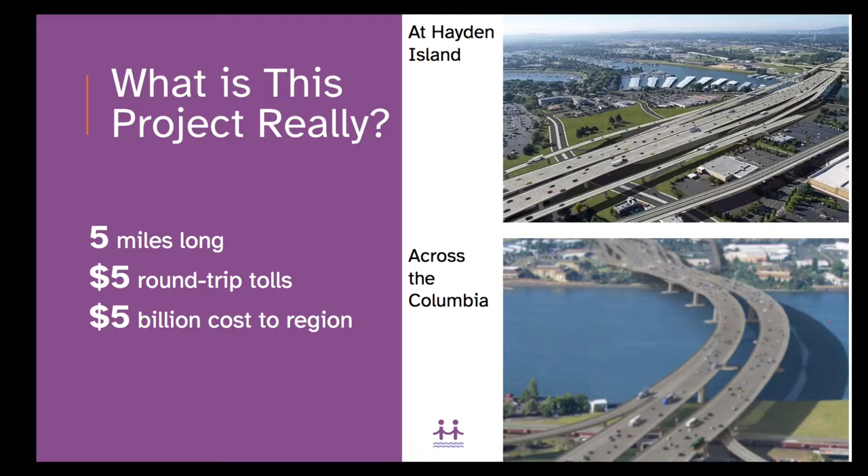And will cost the region $5 billion. It's truly massive. It's not just simply replacing the existing bridges — it's really much more than a bridge. Most of the cost of the project is rebuilding the freeway for miles north and south of the Columbia River.

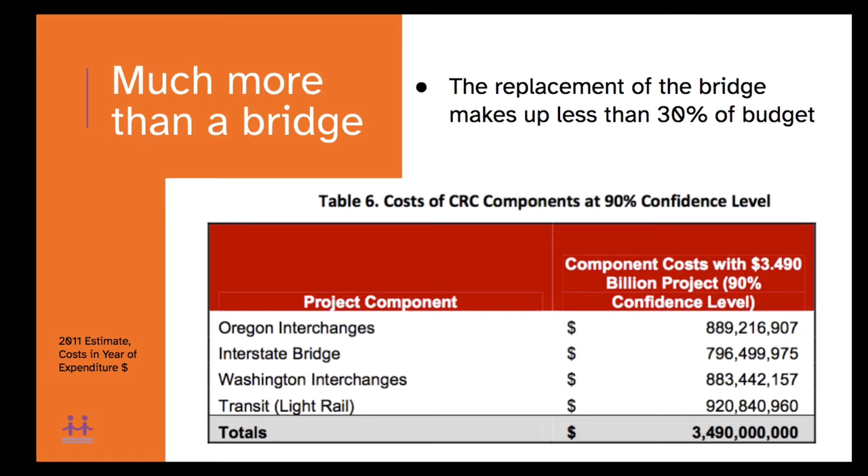Cost estimates prepared for the original project, the Columbia River Crossing, showed that less than a third of the cost was actually building the structure over the river. Most of the cost of the project is rebuilding freeways and interchanges north and south of the river.

And in fact, while the project claims that they're only adding a lane in each direction, it's actually building a much wider structure than that.

Back in the day of the Columbia River Crossing, we were told that it would be merely a 10-lane structure. But when we obtained, by a public records request, the actual plans for the structure, it turned out they were designed to be 180 feet wide, which was more than wide enough to accommodate 12 full lanes of traffic.

And the current project is proposed to be at least 164 feet wide, which is also wide enough for 10 or 12 traffic lanes. So it is not simply a replacement of the bridge, it doubles the auto-carrying capacity of the bridge.

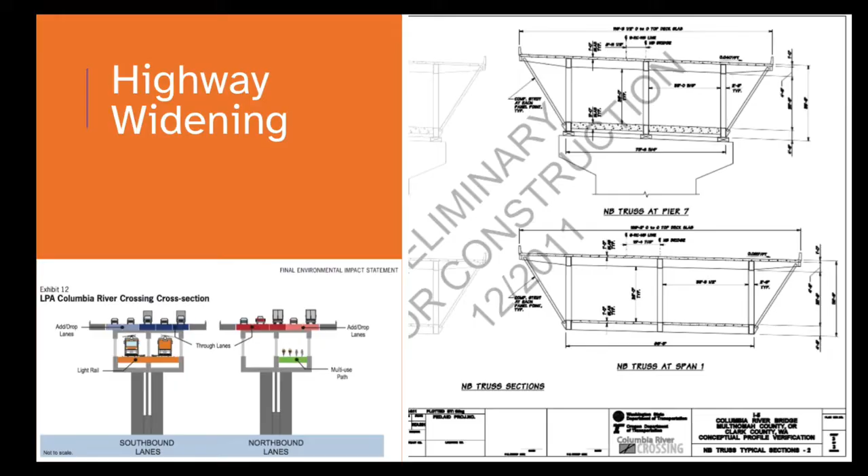Moreover, the justification for the project is based on outdated traffic modeling. For the Columbia River Crossing, the two state departments of transportation projected how much traffic there would be in the future. And for the most part, the IBR has relied on traffic projections originally based on 2005 data.

And that's before the COVID pandemic pushed traffic levels even lower. Not only that, but all of the traffic forecasts prepared for the Columbia River Crossing were wrong — they overestimated the amount of overall traffic growth.

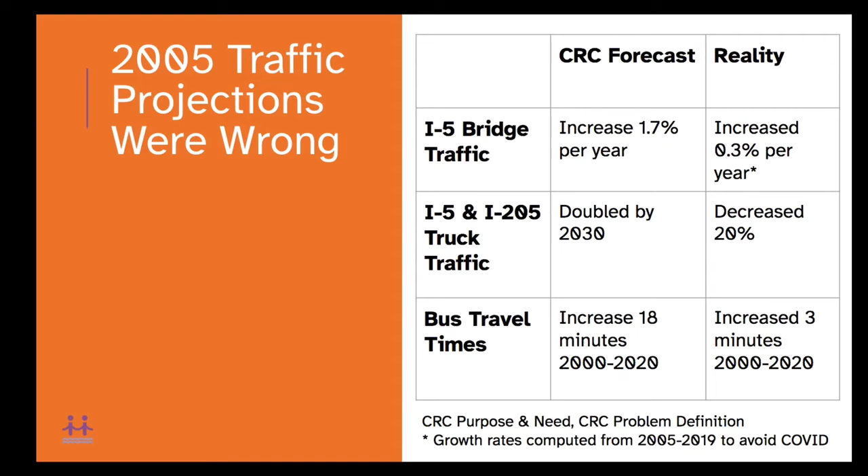And that creates a financial problem for us. The financial problem is that this wider, massive freeway project is extremely expensive. According to the project's own estimates, which are really just warmed over versions of the estimates prepared for the Columbia River Crossing, the bridge and freeway widening could cost as much as $4.8 billion.

But we know the actual cost could be considerably higher. And importantly, the states of Oregon and Washington, once they commit to this project, will be legally obligated to pay the full cost of the project, regardless of how much it costs and regardless of how little money is raised from other sources, including the federal government and tolling revenues.

We've taken a close look at the financial projections for the project, and so far there's a huge, unexplained gap between the cost of the project, which could be $5 billion and likely more, and the amount of revenue that's been identified for it. That gap is on the order of billions of dollars.

Before we embark on this project, we should know how much it will cost, and we simply don't. And we should know where the money is coming from. But moreover, we can be virtually certain that the cost of the project will rise substantially.

Every major Oregon Department of Transportation project has experienced enormous cost overruns in the past two decades. This is a partial list of those projects that includes the Pioneer Mountain Eddyville project between Newport and Corvallis that was supposed to cost a little over $100 million and ended up costing almost $400 million.

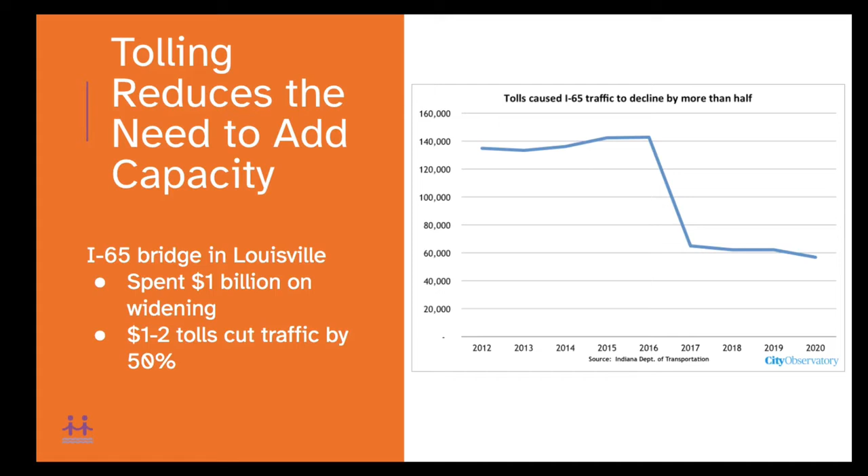The point is, when you toll a bridge, people change their behavior and use it less often. As a result, if we were to toll this new I-5 bridge, it's very likely that it would displace a lot of traffic elsewhere in the region.

Studies done for the Oregon Department of Transportation a decade ago by their financial consultants predicted that tolling I-5 would produce gridlock on I-205 as people sought to avoid those tolls. So essentially what we would do is spend several billion dollars to widen a bridge that far fewer people would use, and meanwhile produce traffic gridlock on I-205.

So essentially the only way these projects will work is if both bridges are tolled, which is something that the two state departments of transportation have not been forthcoming about.

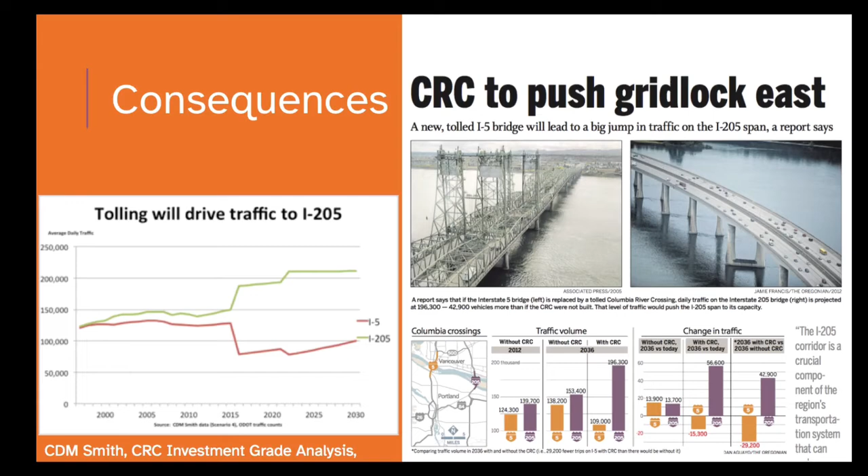Moreover, we're missing really key information about tolling and how it will work. The Interstate Bridge Replacement Project has pushed off to the future a serious analysis of how tolling affects traffic and how much revenue it will raise.

They have just released their first traffic projections, which are incomplete and appear to suffer from the same methodological biases as previous ones. And they have no plans to do independent or realistic tolling forecasts for the next couple of years. Importantly, they're putting off doing what's called an investment grade analysis until 2024 or 2025.

And the investment grade analysis is what the federal government and private lenders will require in order to issue toll bonds for the project, because those authorities know they can't trust the estimates from state departments of transportation.

And the reason we need an investment grade analysis is when outside experts look at projects like this, they come up with very different estimates of how many people will use them, how much revenue they'll produce, and importantly, what level the tolls will have to be.

We know from the work on the Columbia River crossing that the two state DOTs estimated the new bridge would carry 180,000 vehicles per day and need a toll of just $1.34.

The investment grade analysis that was done shortly afterward said that a tolled bridge would carry fewer than 100,000 cars a day, far less than it does today, and that the toll level would have to be a minimum of $2.60. So the investment grade analysis basically halved the number of expected users from the bridge and doubled the minimum toll that people would have to pay.

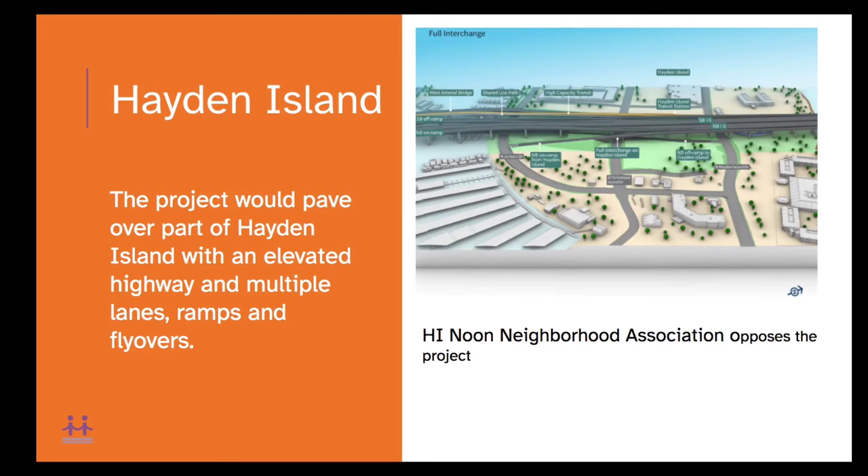It has significant impacts on the people located near the widened roadway. One of those places is Hayden Island, where the roadway would be elevated about 50 feet in the air and cut across the island and be considerably wider than it is today, essentially bisecting the island. So what we'll have on Hayden Island is an elevated freeway and a lot more traffic that will make Hayden Island a less desirable place to live.

Which means when it crosses the river bank in Vancouver, it'll essentially be 10 stories in the air, and it will dominate the skyline. It will be basically as tall as the tallest buildings in downtown Vancouver, and the width of the project will be roughly the equivalent of 3 Marquam bridges side by side. So this is a substantial change to the skyline, the livability of downtown Vancouver.

And the height of the bridge will require enormous elevated ramps across much of Vancouver in order to get traffic from ground level north of the project, near the Vancouver Public Library, to the more than 116-foot elevation of the bridge itself.

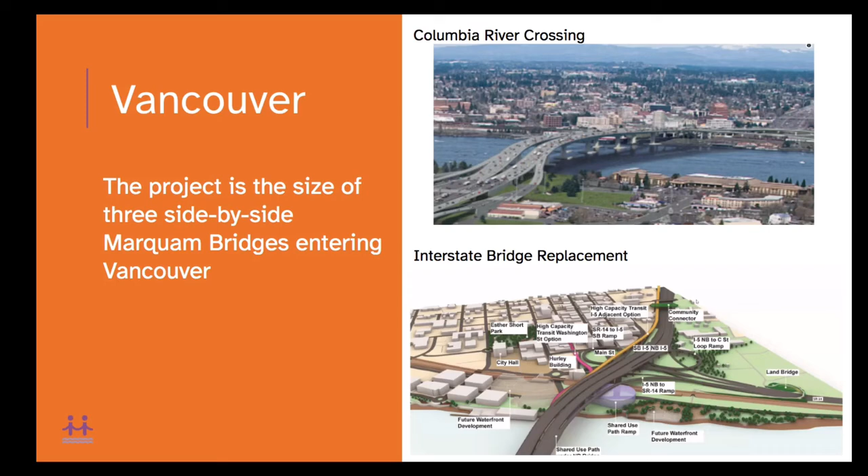Now, a lot of claims are made about the project being needed for safety, but it turns out that the I-5 bridges and their approaches are not particularly dangerous locations. They have lower crash rates than the other major freeway bridges in the region. The Marquam Bridge, Fremont Bridge, and the Abernethy I-205 bridge in Oregon City all have considerably higher crash rates.

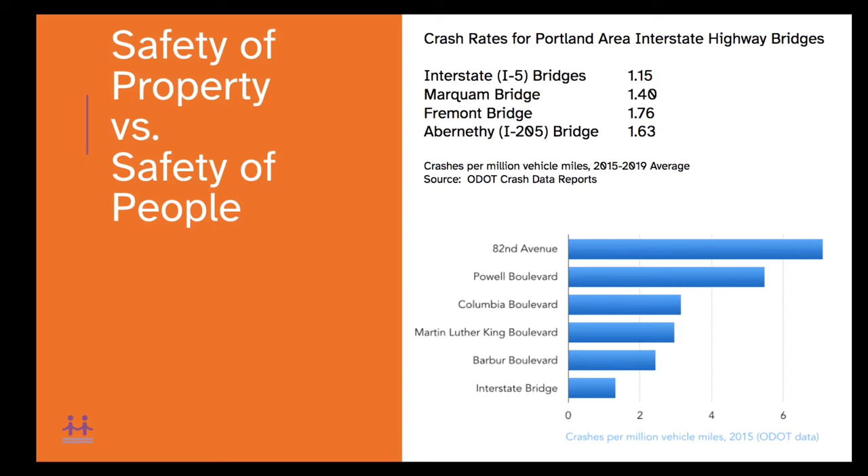But that's actually a bit of a diversion, because the real dangerous roads that are operated by the Oregon Department of Transportation are not freeways. They're the major arterials and boulevards like 82nd Avenue, Powell Boulevard, and Barbur Boulevard, which are much more accident prone, much more crash prone, and produce far more fatalities, and for which there are essentially no plans to eliminate the safety issues there.

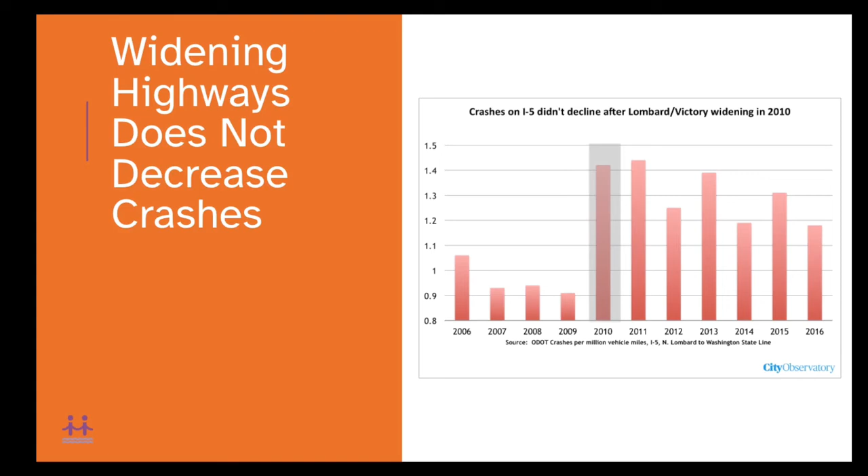We also know that widening freeways doesn't actually reduce the number of crashes. We know that because about a decade ago, the Oregon Department of Transportation widened a stretch of I-5 near Lombard, and after they widened the freeway in that stretch, the number of crashes was higher than before. So widening freeways, while it meets some engineers' desires, doesn't statistically produce fewer crashes.

The other problem with this project is it's completely inconsistent with our climate goals. Last summer we experienced the highest temperatures ever recorded in Oregon, 117 degrees, and we're clearly failing to meet our climate goals. The principal reason is the increase in driving. Transportation and automobiles are the single largest source of greenhouse gases in Portland, and we really need to reduce vehicle miles traveled if we're going to do anything about greenhouse gases and climate change.

We know that adding roadway capacity increases driving, and we're failing to meet those climate goals. Our transportation greenhouse gases are up almost 20% in the past 5 years. Instead of reducing greenhouse gases, which is what our transportation plans call for, they've actually increased over the last 5 years. So we're not merely failing to make enough progress, we're going rapidly in the wrong direction, and building more roadway capacity makes that happen even faster.

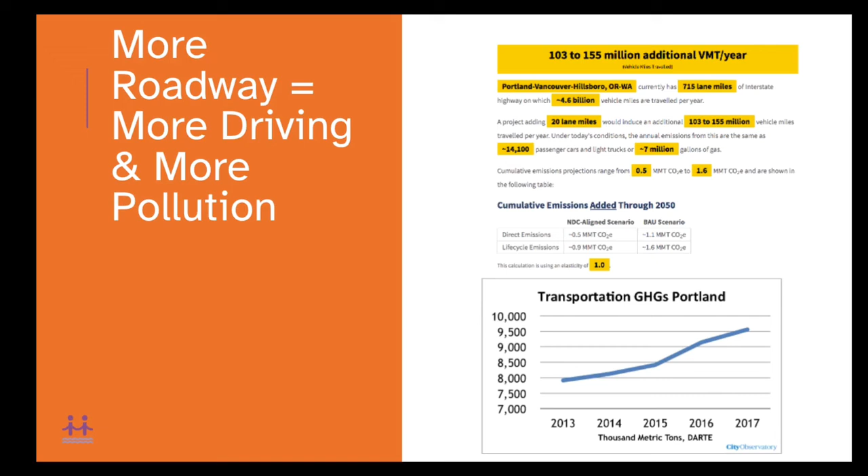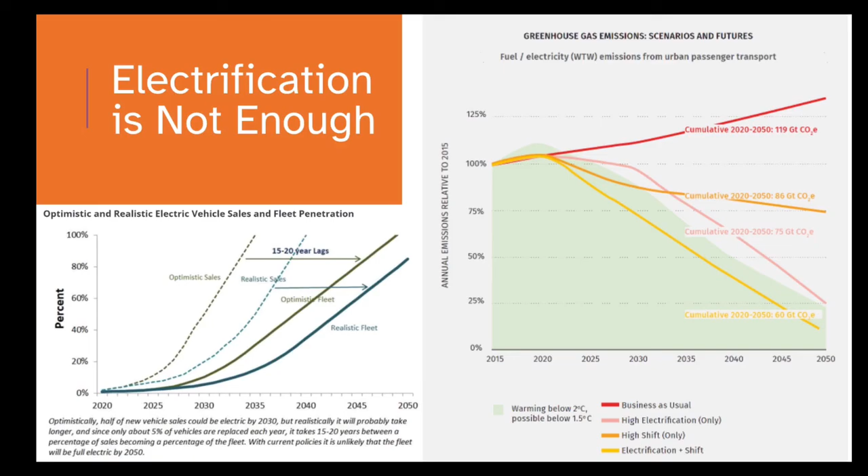We also know that the scientific evidence on the principle of induced demand means that when you add additional roadway capacity, it tends to encourage people to drive more. That's been shown to be substantial through the University of California at Davis's induced travel calculator, the results of which are shown here. While there are other things we can do to address climate change, particularly electrifying transit, it's not enough by itself to make substantial progress. ODOT estimates that only about 2 to 3% of Oregon cars will be electrified by 2030, and electrification simply isn't significant enough or happening fast enough to address our climate problems.

So what should we be doing instead? Instead of a giant project that is really a 5-mile long freeway, where the expensive part is not the bridge itself but all the expanded approaches and rebuilt intersections, we should be looking at a more cost-effective, more environmentally friendly alternative that could address the real problems here.

The first thing we should do from a financial standpoint is the investment grade analysis, so we know how much money tolling would provide, how big a project we can afford, and how big a project there'll be demand for, so we don't end up building a project with capacity we don't need.

There are also things we could do to improve traffic flow right now. We could build an arterial connection so people who live on Hayden Island wouldn't have to get on and off the freeway to travel to and from the rest of Portland. We could close the Jantzen Beach on-ramps at peak hour to improve flow across the bridge, so traffic doesn't back up from people getting on the bridge on a very short substandard on-ramp. We could implement congestion pricing right away, that tolling, to reduce the amount of traffic on the bridge and show us conclusively how much revenue tolling will provide.

By right-sizing the bridge, particularly by going to a lower level bridge and its approaches, we could dramatically reduce the cost of the project. We wouldn't need to elevate the freeway either in Vancouver or on Hayden Island, which would dramatically reduce its cost, and we wouldn't need to rebuild intersections. There are other options for the crossing, including a tunnel and a mid-level bridge with a lift, that would enable us to have that much less expensive option.